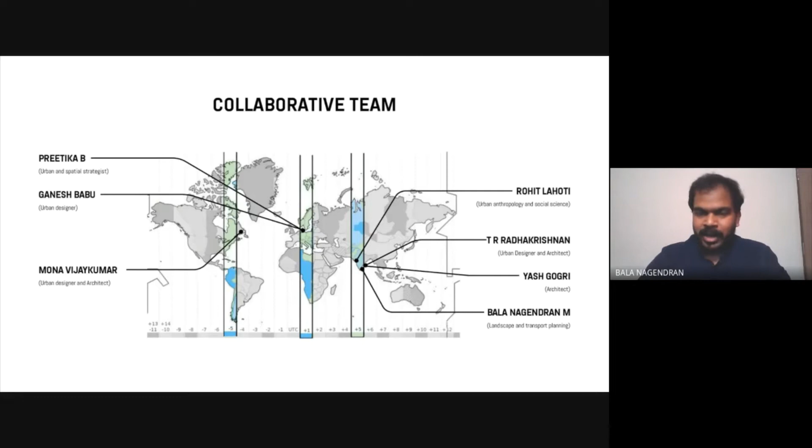We are a collaborative team with members across the globe, as you may see, with professionals experienced in urban design, spatial strategy, landscape, transport planning, architecture, social studies, anthropology, etc. We put together our entry, Loops as Leverage, which won second place in the competition.

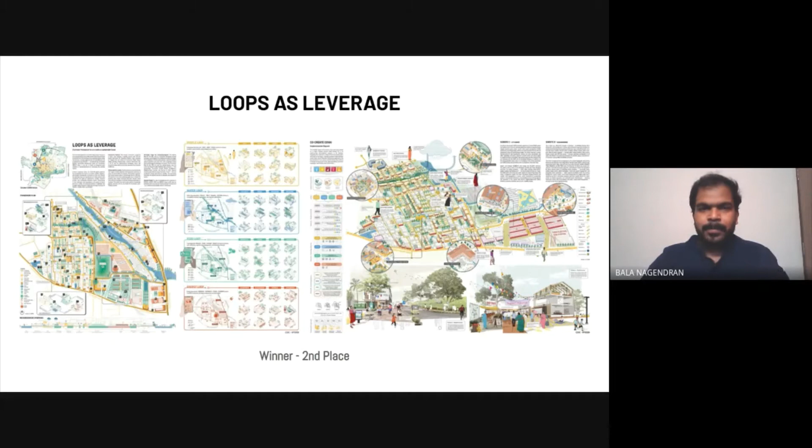So whatever I'm going to present today is going to be the larger insights from working on this particular project, and also how we went about this whole idea of Loops as Leverage itself. So the project process looked like this.

There was an urban design competition where we were invited to propose concept approaches. The second stage of the project would be about project development, where we'll be co-creating design and planning strategies along with the communities and all other involved stakeholders. The third phase would be project mobilization, which requires implementation strategy and construction drawings, etc.

Currently, as you all may know, we have just completed the first part of this whole process, where we have won the competition, and now we are moving ahead to the next step towards developing this idea to the next level. So even in our minds, this idea is fresh and it's in the very preliminary stage.

That also leads us to a stage where this particular session could also become a co-creating process for us. Your suggestions and your questions will also be as valuable as it could be for us to take forward in the whole process of the next few months when we will be working on this project.

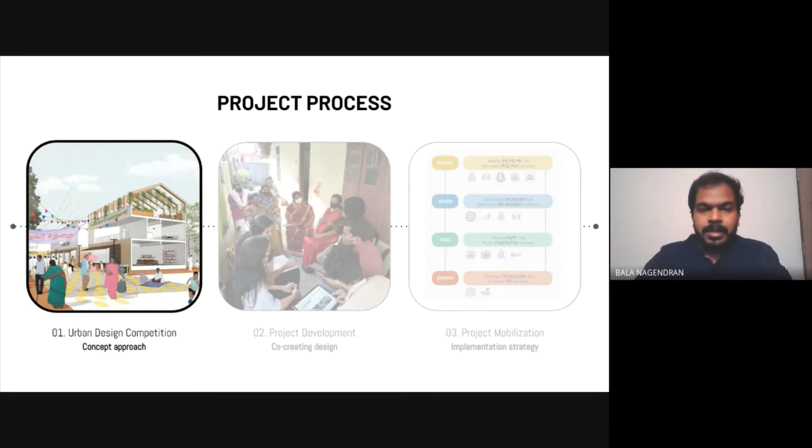So now jumping into the presentation on co-creating circular cities for the case of Kaundampalayam in Coimbatore. When we got the brief to redesign or redevelop the ward Kaundampalayam in Coimbatore, we felt that is a very fresh opportunity in an Indian context, where you have gotten to develop or plan the entire ward. It's not a very similar experience that you get from other urban design projects.

So we wanted this particular project to not just end with the particular ward, but expand at the larger city level. So we wanted to develop from a larger vision and see how that vision could also be achieved, or like this particular project could become a seed for the larger vision itself.

So that's when we came up with the circular Covai vision. For a lot of us, Coimbatore actually means a lot in terms of how the natural resources are in Coimbatore. We might remember the Nilgiris, or it's also an industrial city which have booming economic opportunities. So there are a lot of exchanges and flows happening within the city and also from outside the city.

Understanding all that, we felt this is the right place to also experiment circularity in its pure sense. So we built our vision on three goals: regenerative ecology, productive economy, and inclusive society.

So if I said a lot about circularity now, you must be wondering what is circularity, or what do we mean by circular economy, or developing cities based on circular economy itself. So the key principles of circularity or circular economy work under these three things.

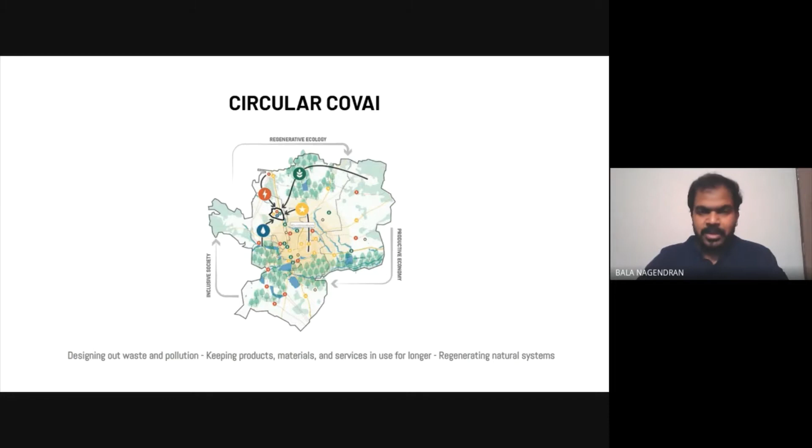First, designing out waste and pollution. Second, keeping products, materials, and services in use for longer. And three, regenerating natural systems. So these principles became the foundation for our work as well. So let's see how we took it forward.

So from the vision on circularity, we were looking to identify what could be the microsystems which will help us achieve circularity. In that search, we identified 4 microsystems: people, water, food, and energy. We felt these 4 systems will embed the vision in the project and also drive us towards a collective sustainable vision for the future. That became our starting point.

So now we have to see how this vision could be built on the particular site we have been given. So we started looking at the assets in the site, like what are the assets existing in the site, which could be aligned to these 4 larger systems, or the loops that we call.

So the first is the people loop. In the site currently, there are a lot of open spaces which the existing local citizens and community are engaging in multiple different ways. So the open spaces became our asset in terms of the people loop.

For water, there is a Sanganur canal running inside the ward itself, which has been completely neglected in its state. So that became our asset.

For food, there is a new market proposal that has been envisioned for this particular ward area, which is a relocation of Coimbatore's wholesale market. It's going to be like a big scale urban project in itself. So that covers our asset for food.

And surprisingly, this ward uniquely had this particular asset for energy. There is a solar park within the neighborhood itself, which we felt is a good way to start for the energy loop. So these became our assets, which currently are disintegrated, and we would like to make it the beginning for a larger circular system.

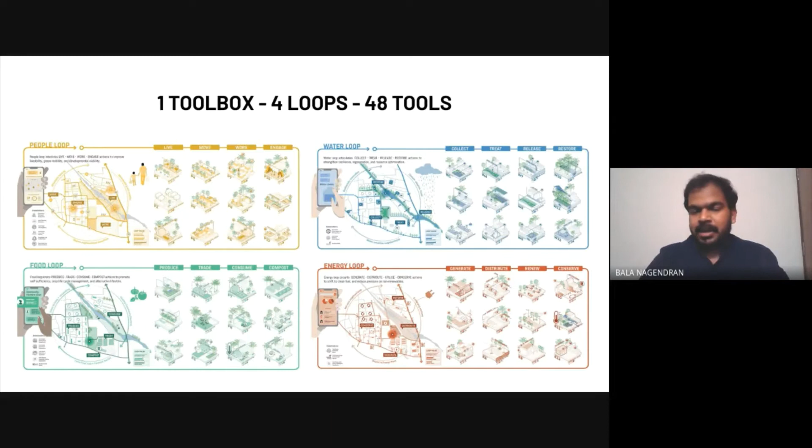So there is one toolbox we want to create. We call it a circularity toolbox. There are 4 loops and we have 48 tools. This is our larger canvas, the larger palette we had, from which we build our design at every stage going forward. So what do we mean by a tool?

How to use a tool? When we say a tool has all these components included in it, it has a micro loop showing how the particular tool will be worked out. For example, in this case, it's a community farm. So the produce will go to the local neighborhoods, the local household itself. That's the micro loop it's forming.

Next is the tool spatial scale, whether it's a large scale tool or something that has to be done in a very small scale. That's what we mean by spatial scale. So you could see an L here, which means large. There is also a spatial unit to say where it has to be implemented or planned—as part of open space, building, street, or canal, whatever it is. And we also have a number to assign it, to relate to it.

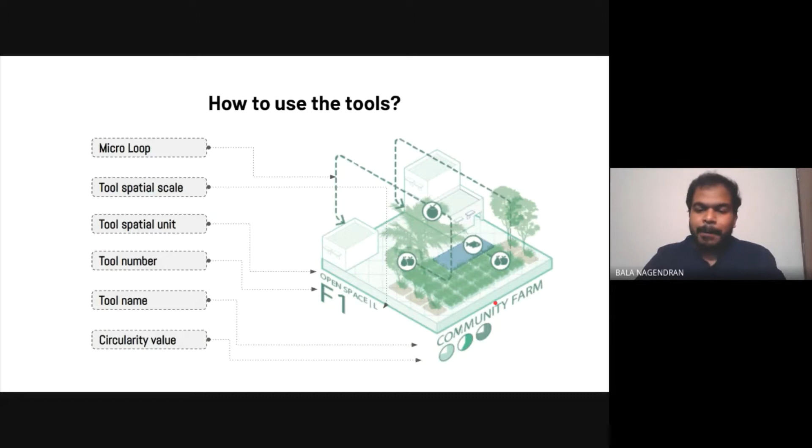And there's a tool name. And most interestingly, there is a circularity value. For every tool, we also worked out a circularity value, which aligns to the 3 goals I spoke about in the initial stage—inclusive society, regenerative ecology, and productive economy. For all 3 goals, we tried to do a circularity value for each of the tools. This information helps us map and assign the right tools for the right places.

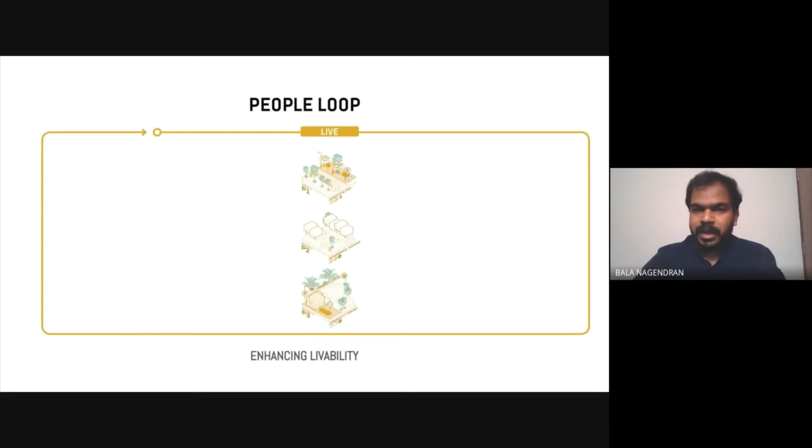So this is how the tool starts. Starting from the people loop, each loop has 4 action words, which gives us further broken down tools. Starting with the first action word, live—we have smart utilities, incremental housing, community forums, which enhance livability as part of this action word. And then move, which has low emission street, no emission street, and multimodal integration to promote sustainable mobility.

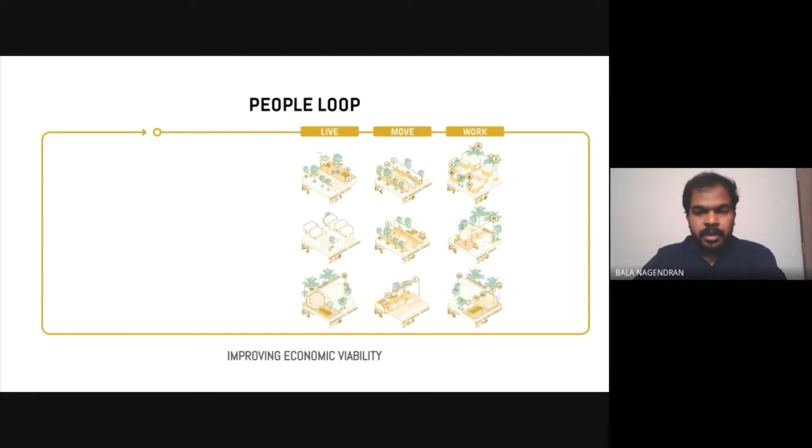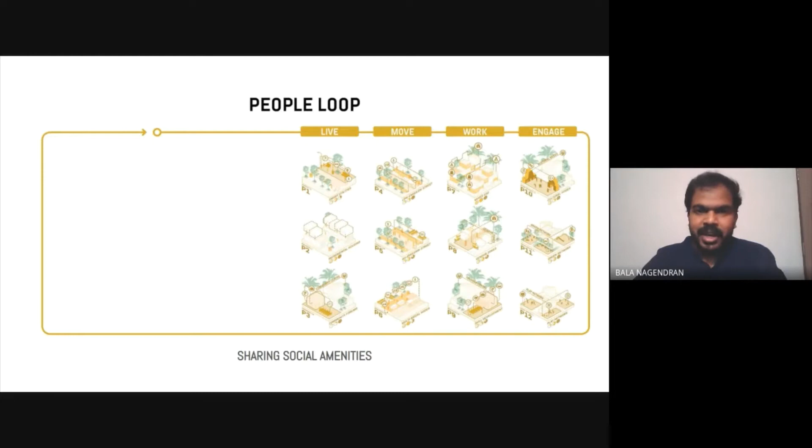Under the work action, we have mixed use development, which can nurture economic growth, vendor zones, and skill development centers for the community. Finally, under engage, we have cultural nodes, green networks, and play networks, which all function as shared social amenities. Once we have all these tools, the next step was to map and see which action words could come where in the entire Kaundamalayam neighborhood, in the entire Kaundamalayam ward itself.

We also went ahead to see who are the stakeholders, on the government side or the non-government side, who could help us achieve this, and also what would be the loop value for this entire process itself. We also looked at ways to build this as part of a virtual experience for people—not only informing them, but engaging with them and involving them in the operations and maintenance components. So that was the larger system.

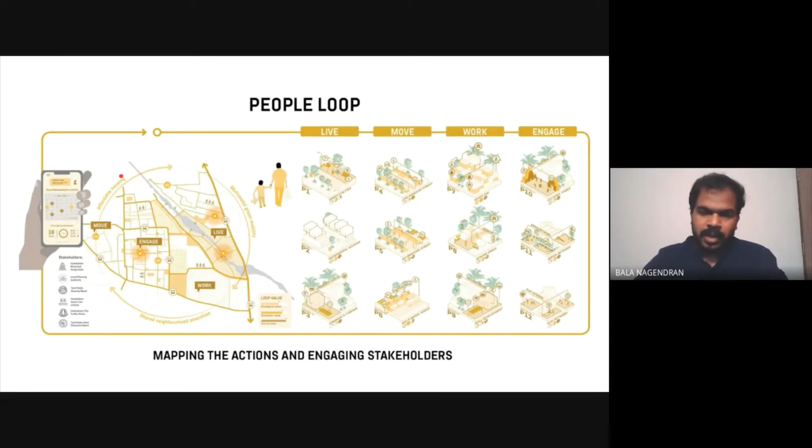So similarly, we worked out all the other 3 loops as well. The water loop starts with the action collect—we focus on harvesting rainwater with multiple tools. The next step is to treat them towards optimizing resources. So we collected them, and now we are treating them through multiple tools, including canal filter system, phytoremediation, and water treatment units ingrained within the building environment itself.

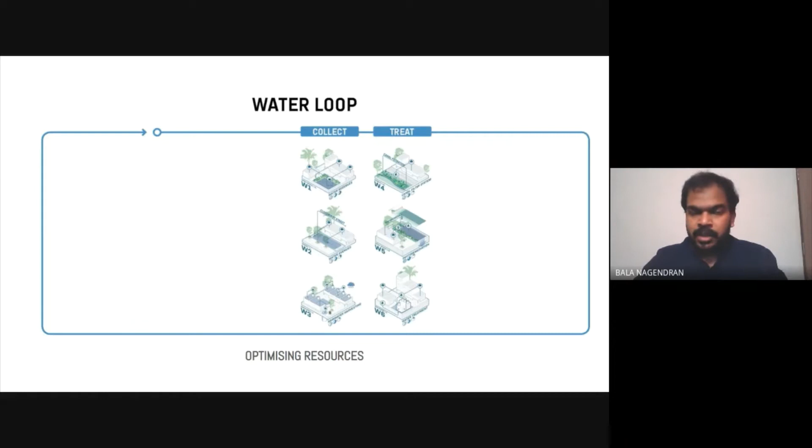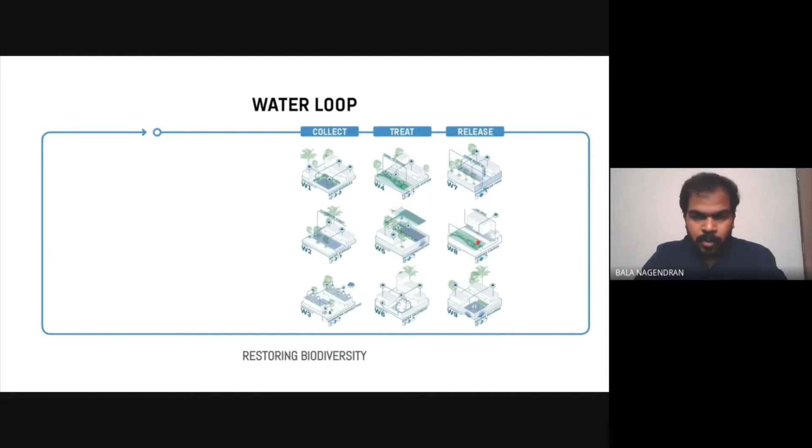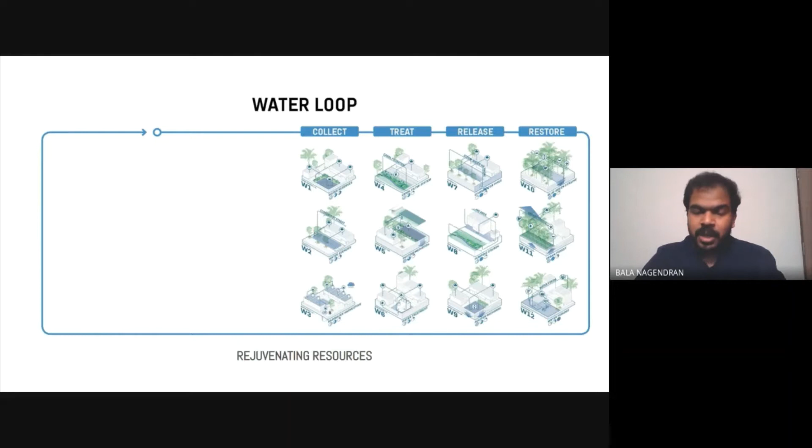And then releasing them in a way that restores biodiversity, like releasing them near a water body via a pumping station, or through direct aquifer recharge activity where possible. The last step is to restore and regenerate resources. So we have proposed blue-green lifelines, urban forests, and water forums, which could be the anchor for governance and other management-related mechanisms.

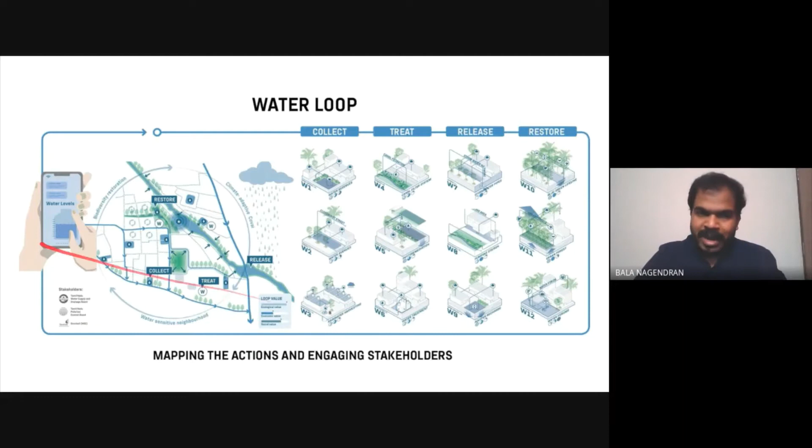So similarly, we did map the same action words on the Kaundamalayam context. We worked out the stakeholders, we worked out the loop values, and saw how we could integrate it with the mobile application. Then it comes the food loop.

Food loop starts with produce. The initial point here is to achieve self-sufficiency, and the tools that we could integrate here are community farms, edible streets, and also community nursery.

Once we produce, the next logical step is to trade, so we see how the communities can trade these produce. And following that, this is where the circularity comes. Usually what we do, we produce, we trade, and the cycle ends there. But when we talk about circularity, it's from starting from zero and again going back to zero, so we have to see the entire process cycle.

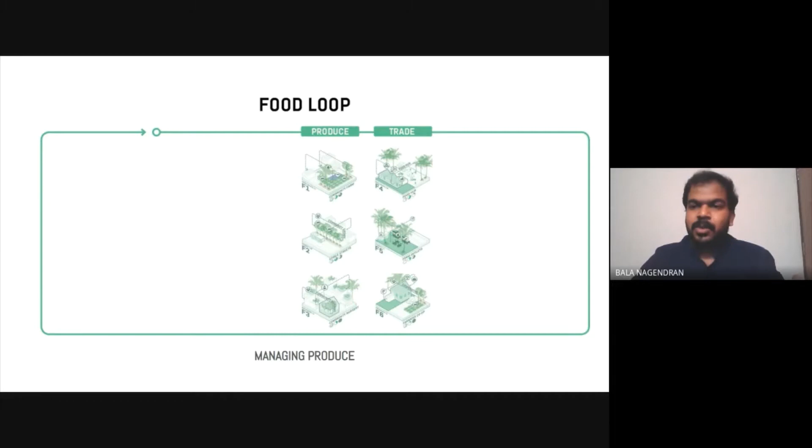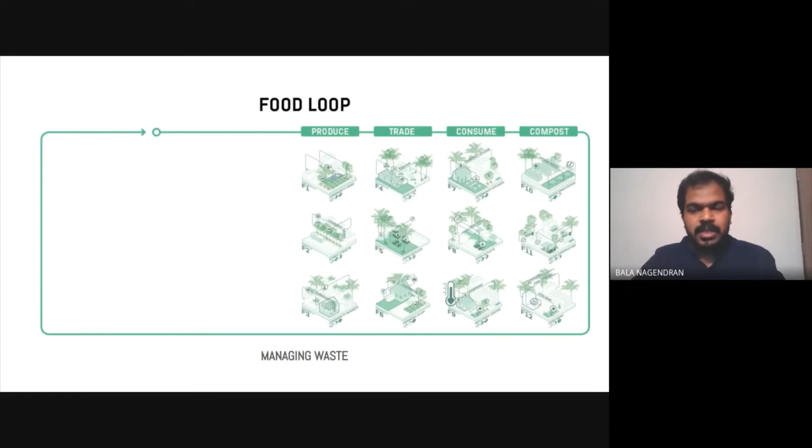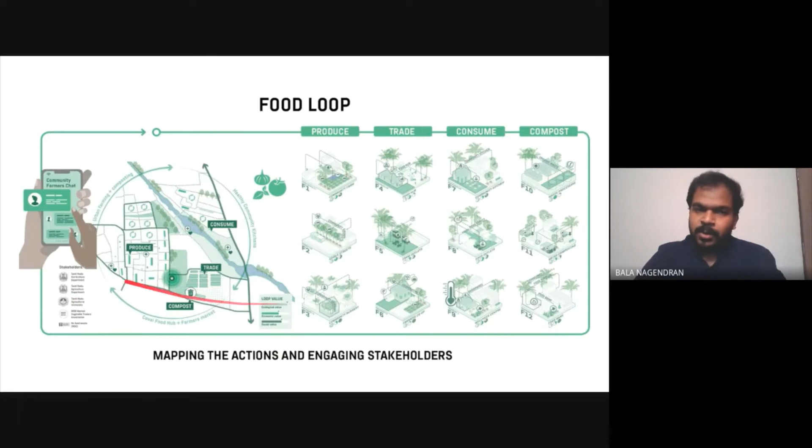Next comes the consumption part, which monitors health. We have community kitchens, food outlets, and also wellness centers included as part of this. Finally, the waste management part is covered through a series of compost tools, which includes microcomposting and also food banks. So again, the same process of mapping them on the Kavundampalayam and identifying the stakeholders, loop values, and integration to the citizen engagement tools.

And the final loop is the energy loop. This is not something very familiar or something we usually include in a planning exercise, but we felt this is really important when we are talking about climate change, low carbon emission, and all of that. This also becomes part of the larger urban narrative rather than just staying as an add-on to it.

This starts from the action word generate. We talk about maximizing the use of renewables. How we can do that is through energy parks or waste-to-energy plants at large scale. All of that could be a possibility.

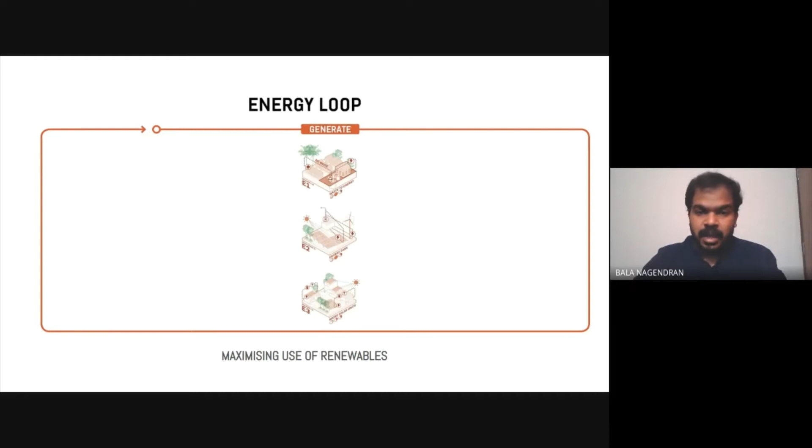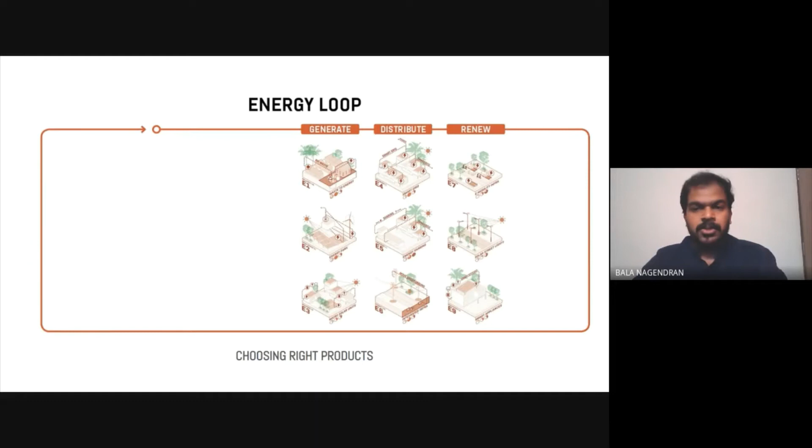Next, once you generate, you distribute that and then renew it. We adopt right products here—it's more of consumer choice on right products, which includes smart appliances, solar street lights, and also e-mobility, etc.

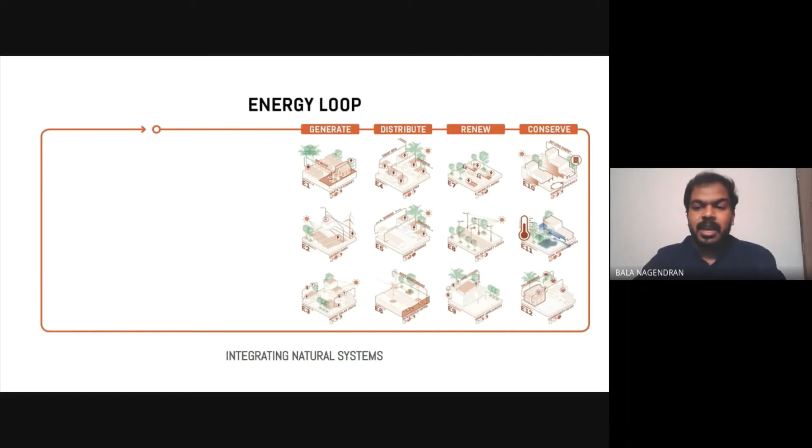And finally, the natural systems for conserving energy. We would have studied a lot of mechanisms or strategies to make energy efficient buildings or to promote cool microclimate in our planning strategies. So all of that comes into picture in the last action word.

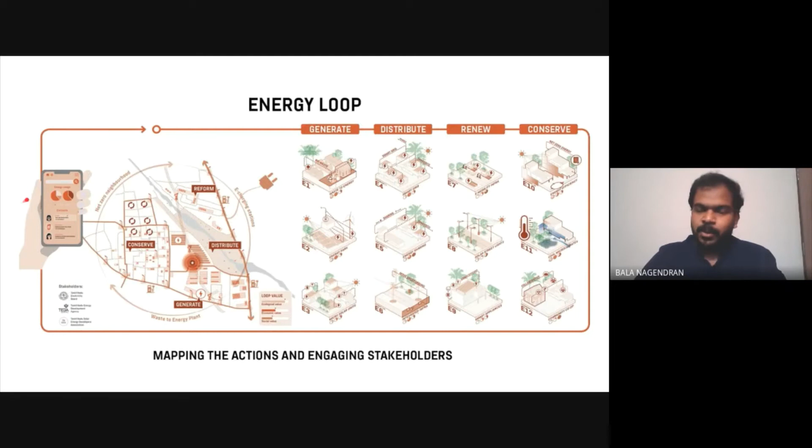As the drill continues, we have mapped them on a Kavundampalayam map and then identified the stakeholders, loop values, and then the citizen engagement tool. So this is how we got and worked together with the entire tool set.

So two things we have to be very clear here. One, we had not forced ourselves to use all the tools in this one particular context. We were very clear that this toolbox is a larger level tool meant to accompany the vision we built for Coimbatore itself. But when it came to Kavundampalayam, we only picked the right ones which suit the context and seamlessly tie up with the context itself.

The second point is that when we talk about all of these loops separately, they might look very clean, neat, and perfect. But how do they all come together? How do we ensure that these loops work together in a systemic manner is the larger question we had. So answering that is the next part of the presentation.

The proposal itself had three components to it after the toolkit part. So we have the toolkit, we built the toolkit, we know the vision, we have the tools for it. Now we are getting into the execution part of it. So we had three components, as I mentioned.

The first one is a ward level framework plan. The second one, from the ward, how do we shift that to a neighborhood concept master plan? And finally, how do we pick designs for smaller pilots within this neighborhood? So these are the three strategic scales on how we approach the entire project.

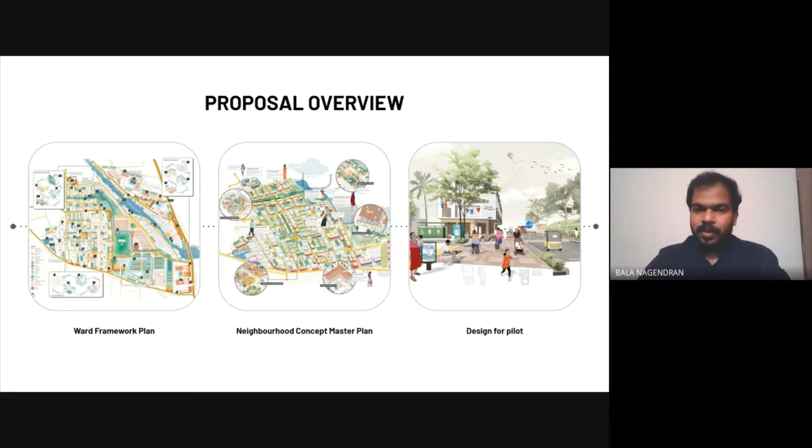The first one is the ward level framework plan. I'm not going to get into the details of every inch and every centimeter of this particular plan. It might look complex, but I'd like to highlight a few things.

At the framework plan, we had to draw some hard lines in the sense that we had to introduce new programs and new activities into the entire framework. For example, this particular piece of land at the bottom is currently an empty space, which is a proposed location for relocating the market, so we drew out the entire master plan for it. Similarly, we included a water system which could run across the entire site and become a blue-green lifeline for the neighborhood. We included such strong character throughout the entire framework plan.

The other thing to note is the smaller numberings you can see everywhere across the plan. Those link back to the toolkit. In a framework level plan, you might not be able to clearly show what has to come here because the plan happens at a 1000 or 2000 scale, which doesn't give enough space to explain everything. So the toolkit is really helpful - you just put the number here, and people can go back and relate it to the toolkit itself, so they know exactly what has to come here and why. That's how the framework plan has been planned.

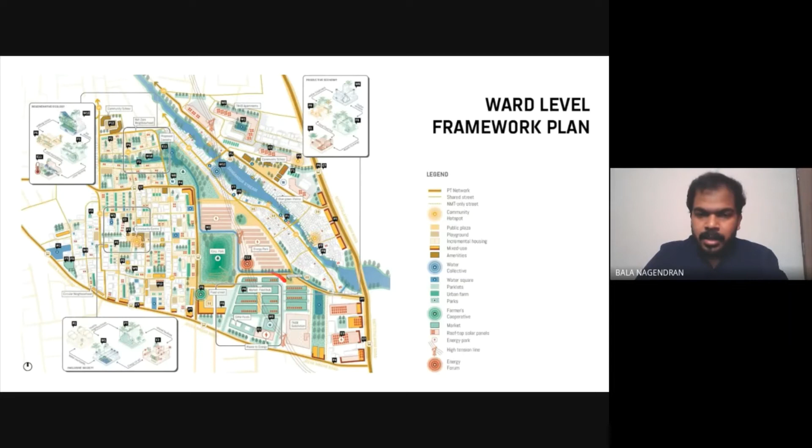Going forward, the next step was the master plan. In the larger framework, we picked up two neighborhoods - one is a residential neighborhood you see here, and then the market complex itself. These two neighborhoods have been picked for further detailing, which is what I'll explain now.

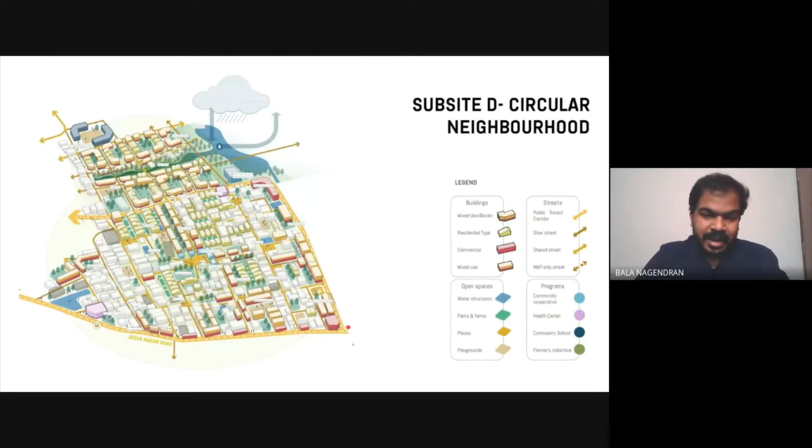The first one is the circular neighborhood. This neighborhood is currently predominantly residential, and it's also a typical suburban neighborhood in any city that we might encounter. Here our approach had been a trifold approach.

The first was we wanted to see how a greenfield development could happen here. If you see the large northern chunk of land, it's completely empty for now, so we tried to see if we could completely land pool and land consolidate that area, and propose a uniform grid system to comprehend our idea about net zero buildings on super blocks itself. So that was one approach.

We also demonstrated infill development here. The white buildings you see are the existing ones, and you could see a lot of smaller plots which are empty within those white buildings. Those are the infill development we thought could come in within the existing fabric.

The third approach was a retrofit approach, where the buildings mostly on the periphery are existing ones. We didn't want to touch them and change them completely - we also can't do it, that's not a feasible way to go about it. But what we did is propose land use changes and augmented open space management, in order to see how they could also fit into the larger fabric with the new vision itself. So these were the three larger approaches we took for the circular neighborhood master plan.

Another thing we took into consideration was densifying the street network. The current scenario doesn't have such a dense street network which would encourage people to walk and cycle. We densified the street network further with punctuated plazas and smaller pocket parks wherever possible, which also helps the city develop in a more breathable manner. So these were the primary considerations.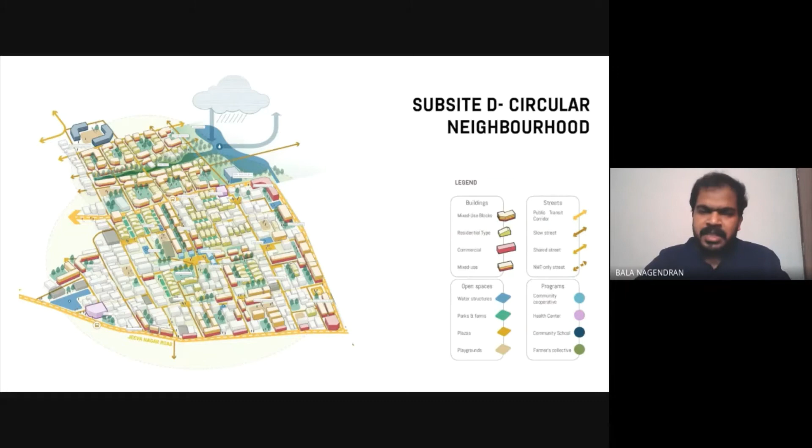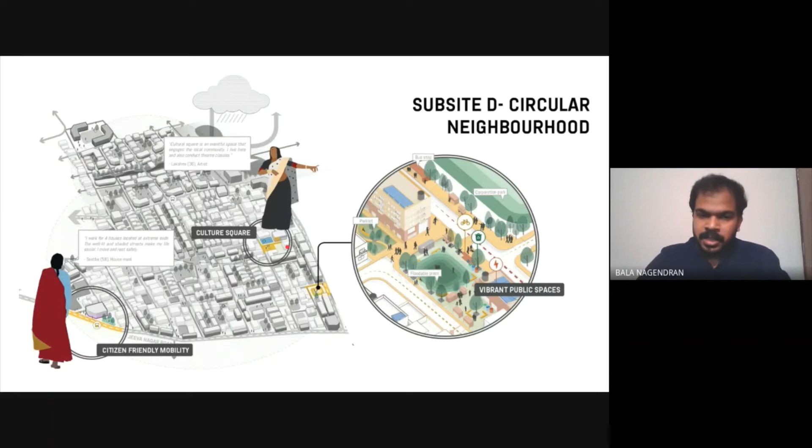We picked up some scenarios to build from here, including backyard farming, community school, and we also included an inclusive skill training center as part of this plan. We had a vibrant public space corner with a plaza and other amenities around it, a cultural square, and also citizen-friendly mobility in the form of public transport networks.

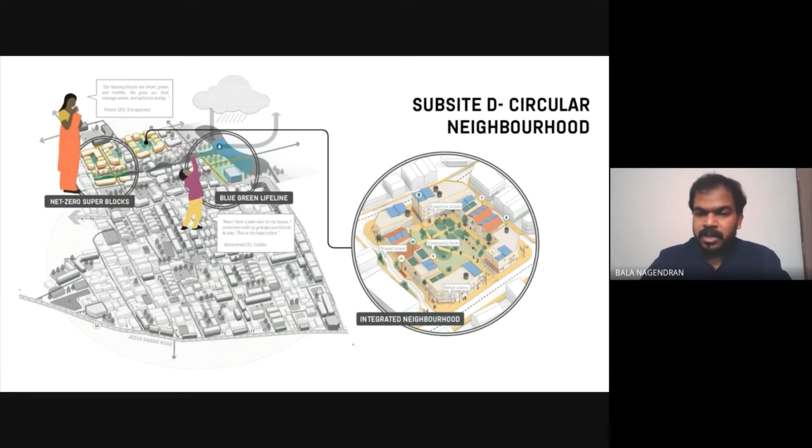As I mentioned, this particular patch which we took completely as a greenfield development, we explored the idea of super blocks on a very micro scale. This isn't something you can equate to the scale seen in other cities which have already explored super blocks - it's a very micro scale version, but how the tools we spoke about could fit in here was the experiment we tried to do. So that was it about the circular neighborhood.

The second part of the neighborhood is the circular market. Market in itself is a very tough and tight typology to work with, because it has its essence in chaos - it has its essence in the lack of order, right?

That's how we associate a market. But we had to also bring in the perspectives of how this could become a public space and how it could interact with the existing public fabric outside.

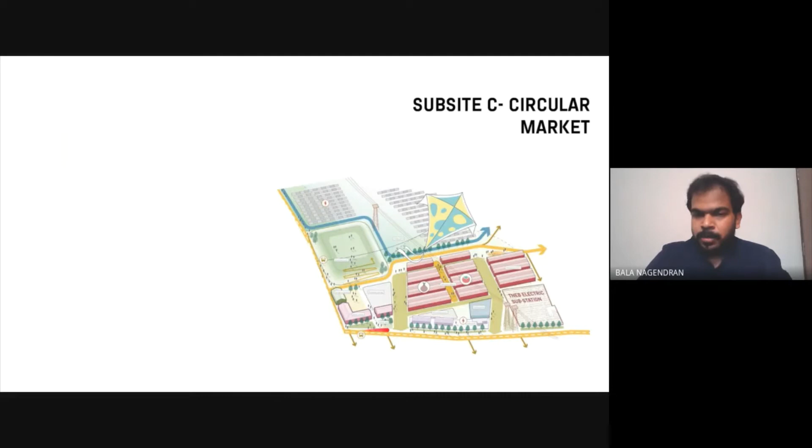For example, we looked at three major zones in the market, which I'll explain now. The first zone is the public plaza, which is like a retail market setup along with the plaza, interacting with the existing corporation park. This mound is a park by the corporation, so we wanted to see how we can expand that open space further and make it one larger open space which connects with the main road itself.

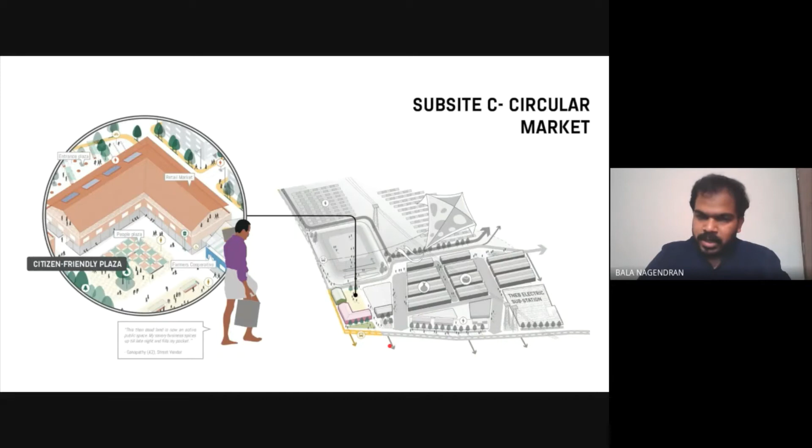The second section is the wholesale market, which is going to be like a dense market environment with a lot of activities of unloading, loading, etc. So that's how it's been organized as well.

And the last section is an interactive market edge, which connects with the low-income neighborhood located on this side of the site itself. So they will have activity areas, basic amenities like public toilets, workshop areas, community center, all of that. That is what's covered in this large segment.

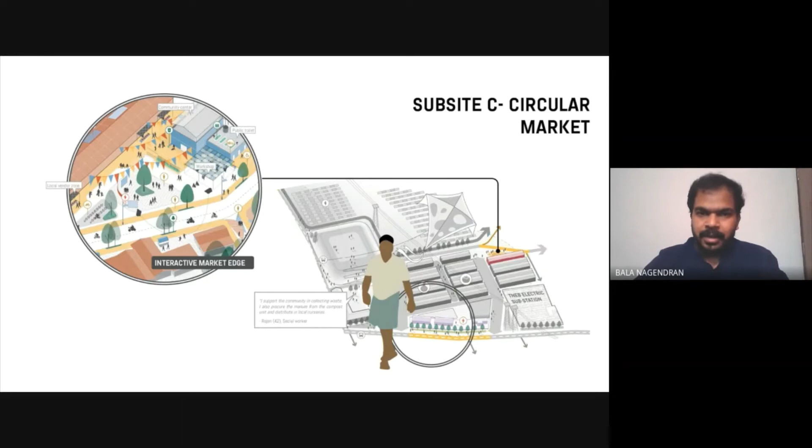So this comprehensively covers our master plan level work. From here, we moved on to the pilot design. We picked up two pilots which could help the city initiate this whole work.

Okay, we have a great vision. We could have a lot of goals, a toolbox, everything. Finally, where do we start? We need a tangible beginning point for the city to accept this proposal and take it forward. So we picked up two pilot projects.

One of them is here. If you see, this is the street network next to the corporation park. Currently the park is in complete neglect and underuse. We wanted to make sure the accessibility of the park is very well addressed, which will enhance the value of the neighborhood and improve the quality of the public space around it. For that reason, we picked this as the first pilot.

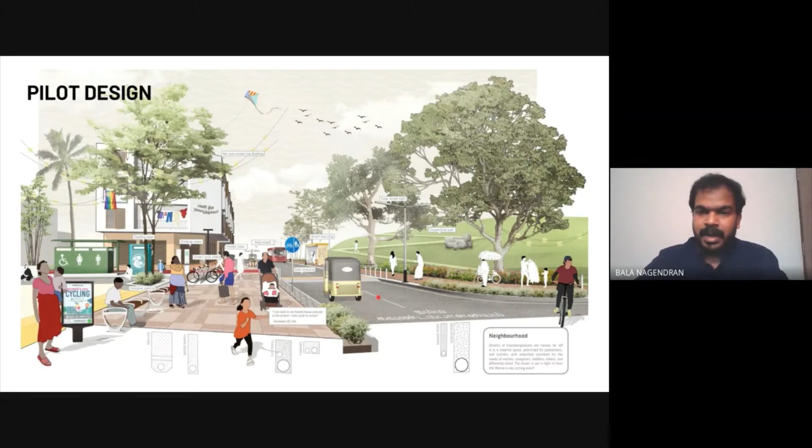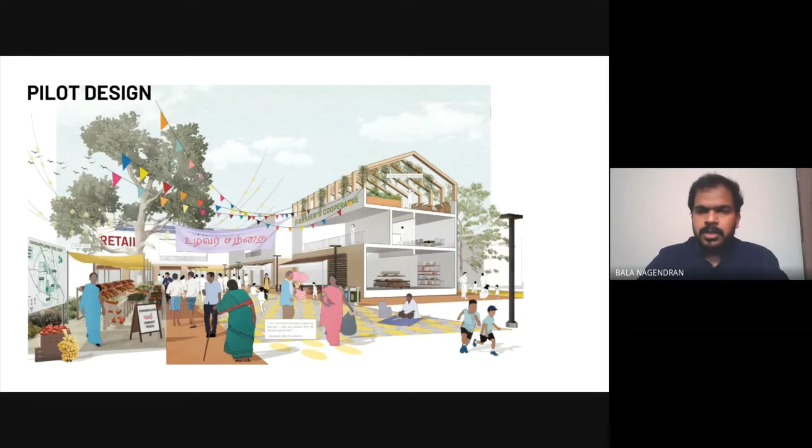Our second pilot is the People's Plaza within the market itself. Though the entire market complex is about 13 acres and it's going to take a lot of time to come into picture, this particular zone with the People's Plaza could be brought up in very few months, even without enough budget. We thought this could be the other pilot project which could engage people and also have good visibility for the project itself. So these two became our pilot projects.

So now we have all these plans and designs. What is the implementation strategy? Of course, we will be doing a very detailed implementation strategy at the end of our work. This is just an initial framework that we have developed. Our implementation framework has three phases.

The first one is piloting catalyst, which I mentioned now. We have pilot projects identified for each subsite, which will act as a catalyst for the larger vision of the project.

Once these pilots are in place, the next phase is to expand the network. For each of the loops - people loop, water loop, food, energy - there are certain levels of networks we have to create. For example, for the people loop, we might need mobility and open space networks. For water, we need stormwater and biodiversity networks. For energy, we might need smart grid and e-mobility networks. We need to create these networks so that it works seamlessly and not in a disintegrated manner anymore.

Finally, phase 3 is activating systems. When we say activating systems and call it phase 3, it doesn't mean that it happens last. It's something that has to happen from the very first day of the project, but it will end at a much later stage - it will take a lot of time to settle. That's what we mean by phase 3 here.

So what do we mean by activating systems? There are a lot of existing policies, guidelines, and programs which already align with all these concepts and thoughts we have. For example, if I pick up the energy loop, the government already has a Tamil Nadu domestic solar roof subsidy scheme, and also a Tamil Nadu electric vehicle policy.

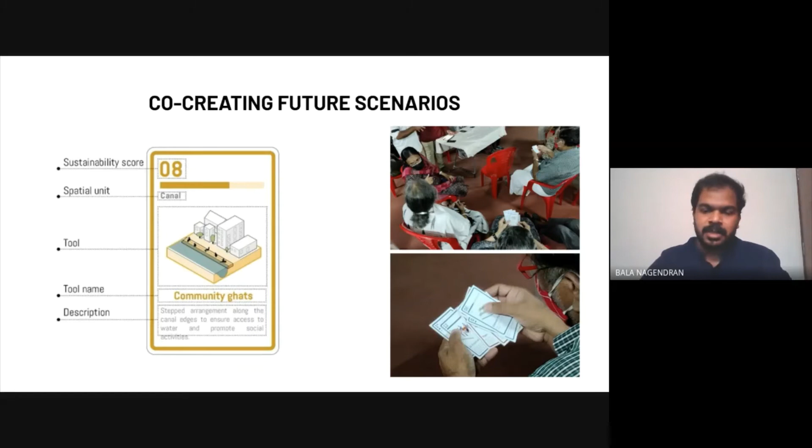We are still exploring other ways of doing it as well.